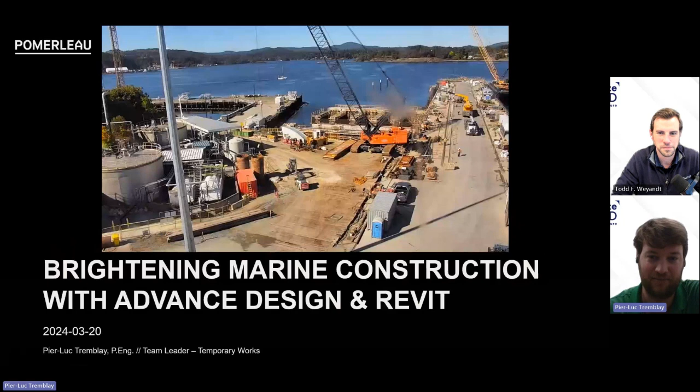My name is Pier-Luc Tremblay, and I'm the team leader of temporary works at Pomerleau. So, the AB Jetty recapitalization project: in Victoria, there's a naval base, the CFB Esquimalt, the Canadian Navy, and we are doing a big jetty for naval ships. I want to focus our attention specifically on the 19B, which is the bent at the end of that humongous pier.

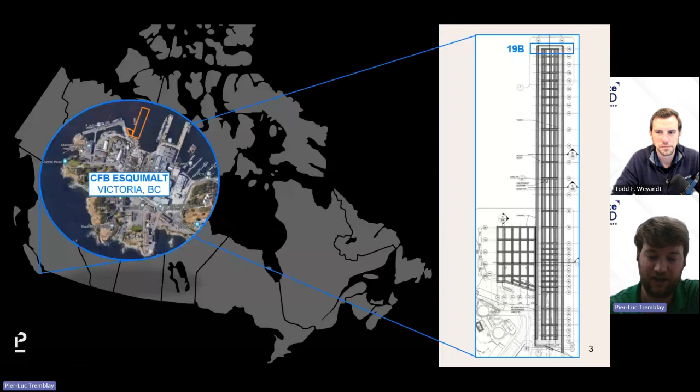It was a great challenge for us, and it went pretty well and was a great experience to share.

The 19B bent is big. It's 4 meters high by 4.1 meters wide, and the length is 26 meters. So we're talking about 430 cubic meters of concrete, approximately 43 trucks of 10 cubic meters, but it could be more. There's a lot of formwork area around it, with openings, and it's a big bent that's over water onto permanent piles, with a big structure going on top.

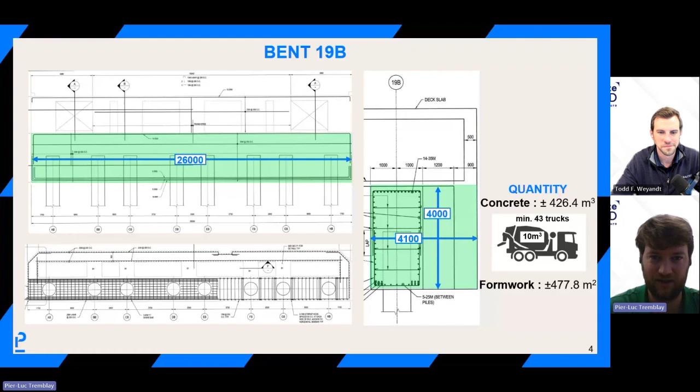So it was a big challenge to design all the falsework and the formwork to go into it. Another challenge was that we had a lot of parties involved: for the formwork we had EFCO, and Deep Foundation Works for the temporary piles.

We had Ruskin and RISEC, which are the geotech specialists. For the falsework, we did the design internally at Pomerleau, but fabricated it with United Engineering, and we were reusing the girder beam system that Ruskin used to drive all the piles. So there was a lot of coordination there.

Our client was the government of Canada, and the consultant was Stantec, and we had to verify everything with them so that everything went well.

Pier-Luc, can you describe the challenges you faced collaborating with so many different parties and partners throughout the different stages of this project workflow? How did you address these challenges?

It was a big challenge, but like always, coordination and open communication is key. We had weekly internal technical meetings involving the superintendent, project managers, and everybody involved in the team, to make sure we had our heads settled together and were delivering the same message. At each point we were presenting it to all the parties, especially for the formwork at the beginning, because we needed the formwork to match the falsework.

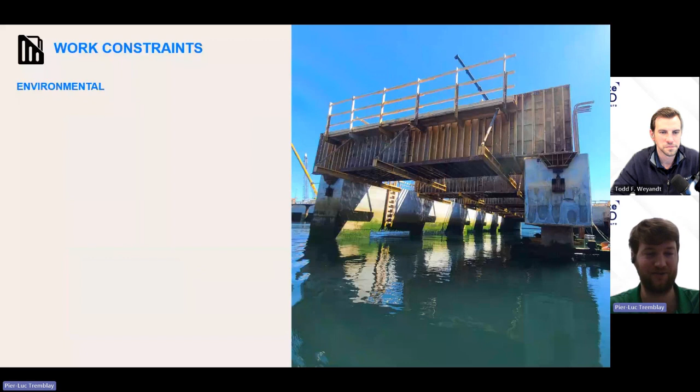First of all, the environmental constraints were that we were working in water, doing marine work with barges and divers. In the area there's a huge swing in the tide - you can see a 3.4 meter difference in head, and the buoyancy in our system was clearly affected, especially since it's salt water, which is heavier than fresh water. But at least we had still water, so we had negligible flow - it wasn't moving anything around, so that wasn't a big constraint.

The next constraint was the economic one. A dollar sign is mostly driving a decision, but in this case we really had to optimize the works because all the marine works cost a lot, and resources were unavailable, so we had to optimize for sure.

One of the biggest points too is that it's the last bent, so it's a crucial milestone in the work sequence. If we have a problem there, it's going to jam the end of the project and jam the rest of the installation of the pier. So it's a bad thing.

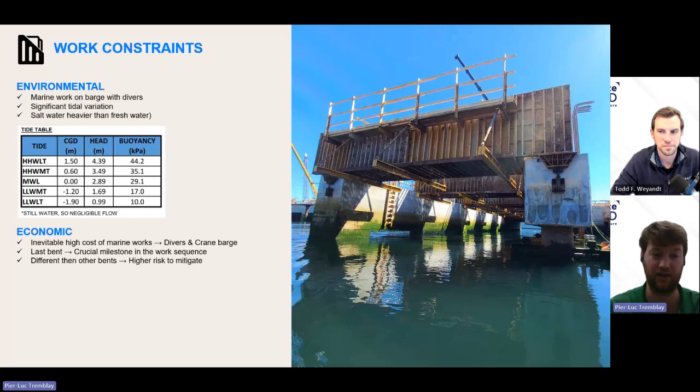The other thing is that it's different - I showed it quickly at the beginning, but it's eccentric and the other bents weren't. So there was a higher risk to mitigate since it was different than the other bents.

And in this context, the formwork and the deep foundation were designed by others, so that's one of the issues we had to deal with - we had to communicate a lot. And we were reusing some falsework, so we needed to inspect and validate each structure component.

Yeah, so you mentioned it there, but the underwater conditions present a unique set of challenges. How did you guys discuss these challenges? And then if you can explain how 3D modeling really helped assist in overcoming these.

Yeah, for sure. Underwater work is increasingly more challenging, mostly because you can't see anything. It reduces visibility, and everything is done by hand, so you need to think always less manipulation. Divers are exposed to a higher risk just by the fact that they are underwater and have a lifeline going up. So there's a lot of risk into this job, and yeah, there's the financial part of it that required us to plan precisely.

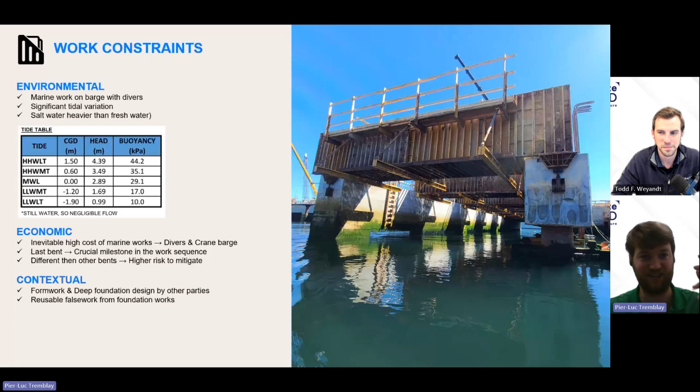And there are all other constraints that we need to think about just before doing the design and the planning. So before I show you the design, I'll just show you what happened in a brainstorm meeting, because it's crucial.

First of all, is the bent stable without support since it's eccentric? Well, the answer is no, and it was confirmed by the consulting firm. So we had to leave the structure there and dismantle it after we finished the deck on top, so we could just go from under or sideways for the dismantling. So it needed to be easy to dismantle. That was a hard one.

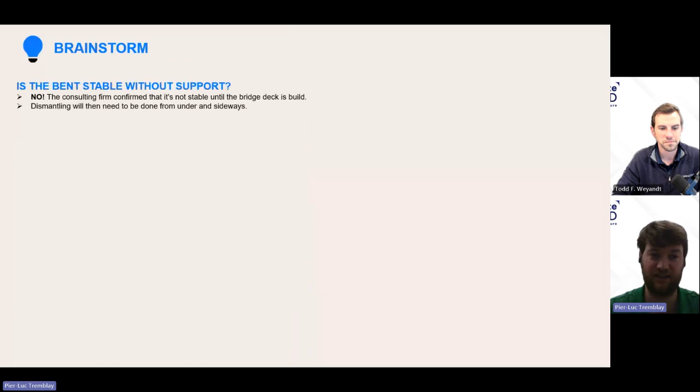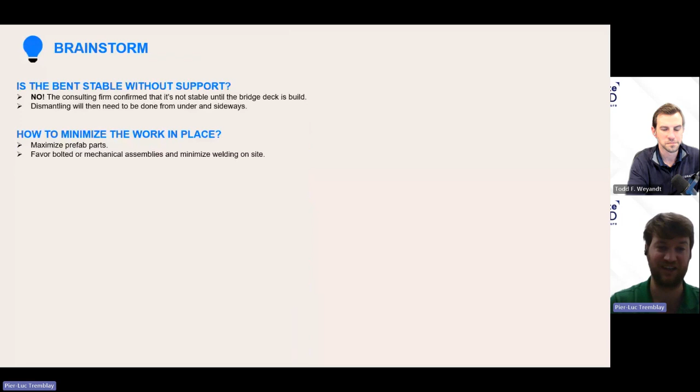How to manage the work in place? Well, how to minimize the work in place? Everything we needed to maximize the prefab, for sure. That was one of it, and everything needs to be bolted because everything needs to be assembled on the water. So if you introduce welding, it's a bad idea unless you need to do it.

Also, how to optimize the falsework? Well, since we're reusing a drilling template, we thought we could just use it and put a soffit on top, so that we could just bolt the EFCO formwork all around. That was a good idea because we saved a lot of formwork there, all the bottom formwork, by using modular platforms.

And another thing that's so important and could have been overlooked is that for the lateral bracing of the formwork, we could have gone downwards, but the problem is you'd expand your falsework for absolutely no reason, because you can't actually brace your formwork with the A-frame system at the bottom without extending the falsework underneath. So everything would go upwards, and that saved a lot of steel and structure and complexity. That was some of the best collaboration we had with EFCO about that.

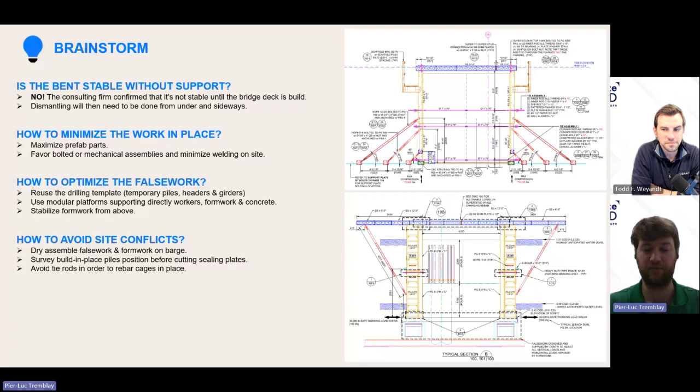That was great. How to avoid conflicts to make sure that everything fits? Well, we needed to do a dry assembly beforehand, and we needed to survey all the piles in position before we cut the sealing plates, which I'll show later. And we needed to avoid tie rods in the formwork, because we couldn't place the rebar cage if we had done that. Since it's on water, we want to build big rebar cages and just drop them in, and that's the best way to do it.

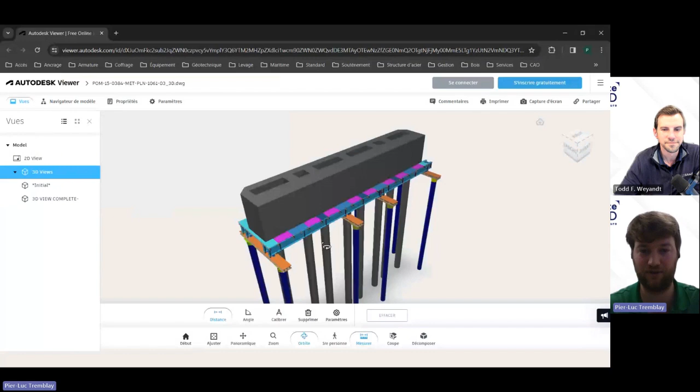So that brings me to answer back, how did we manage all those conflicts and constraint questions? How do we put that into an image? Well, by using Revit, we've done a big 3D model, and that's what I'll show you there. We put it into Autodesk Viewer, so you can actually just go online and share it to all your parties, so they can just look at it as if they're there.

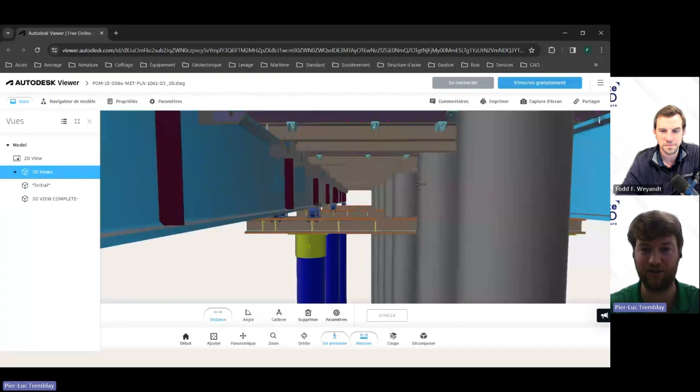And one of the most useful functions, I think, was the first-person one, because you could actually go under and see everything as if you're a diver. So to answer your question, Todd, that was one of the biggest helps we could have, because the divers could actually go under virtually and think about, okay, will I be able to bolt that there? Would I be able to put the gap clamp?

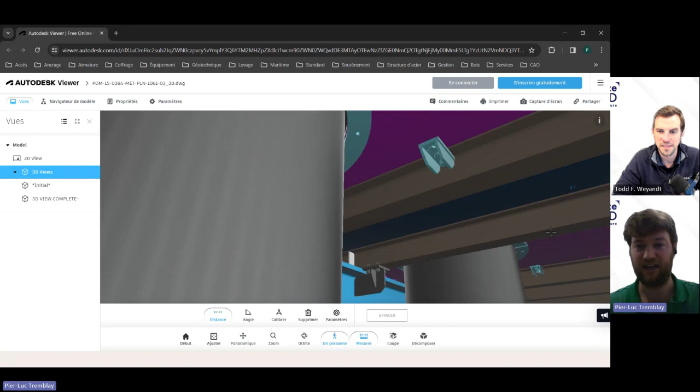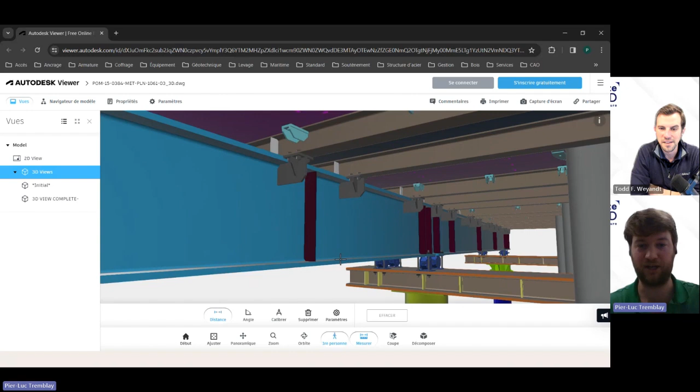Will I have a conflict there with the sealing plate and the actual pile? Can I go there and fit my hand? I'm not sure, well, I'll take a measurement. So you just go there, take a measurement, and oh, okay, I have like around one foot-ish, a bit more. Oh yeah, I'll fit. And then you can actually go step by step, at each pile, make sure everything fits, see that you can access the jack.

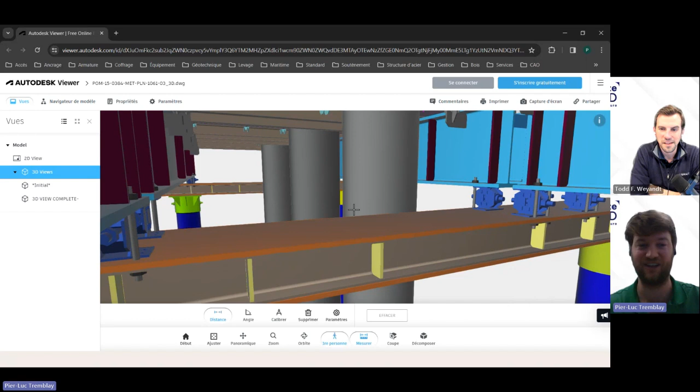And that could look like a minor detail, but the jack screw needs to be on the right side. It needs to be on the exterior part. If it goes on the interior part, well, you don't have access. Do you have a conflict with the ties and the stiffeners? Does it fit on the cap seat there? So that was an amazing tool.

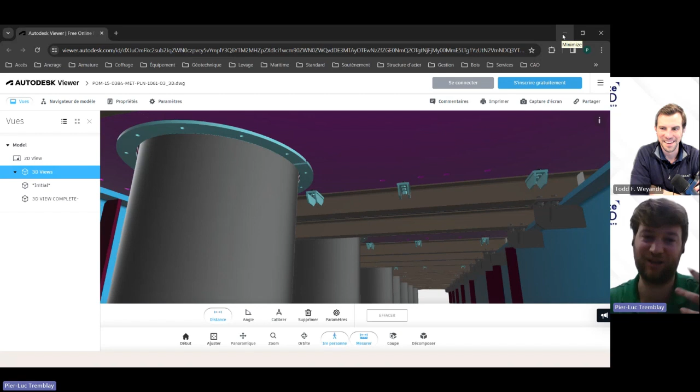And imagine showing that with everybody around, and everybody just looks at it and understands instantly what's happening. So yeah, that was one of the big pluses, let's say, of how 3D modeling can help a construction - pretty much through Autodesk Viewer and a good 3D model there.

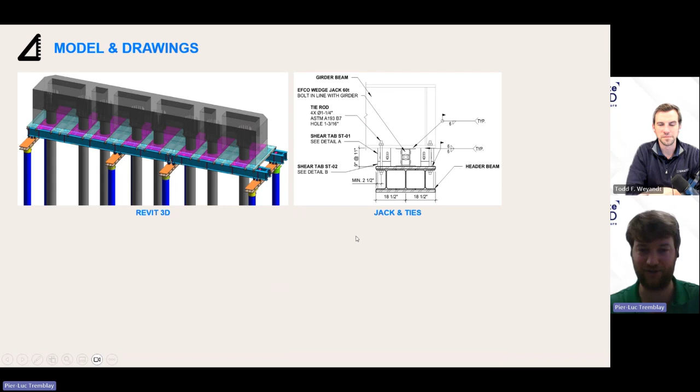So I'll show you. By introducing this model, I'll show you a couple of details that were invented and designed for that falsework.

We had a jacking system with shear tabs and ties. Shear tabs were to take the shear loads while being able to put down the jack and open it up and close it up, because at the end, when you pour that, you need to jack it down to strip it out. You can't just leave it there, it would be jammed. So you always need a jacking system.

On top of the temporary piles, we had cap seats, centered ones and offset ones, because construction is not perfect. It won't end up perfectly like on a drawing. All those piles had a tolerance and we needed to fit in. That's why the sealing plates were put afterwards and cut last minute to fit in, because all the piles had a different position than on the plan, so we had to fit it all.

Those sealing rings are just around the pile, we saw it in the 3D. It's to seal - you just put a foam in between and seal everything up, because you don't want water to come into the formwork while you're doing the rebar works. You don't want that.

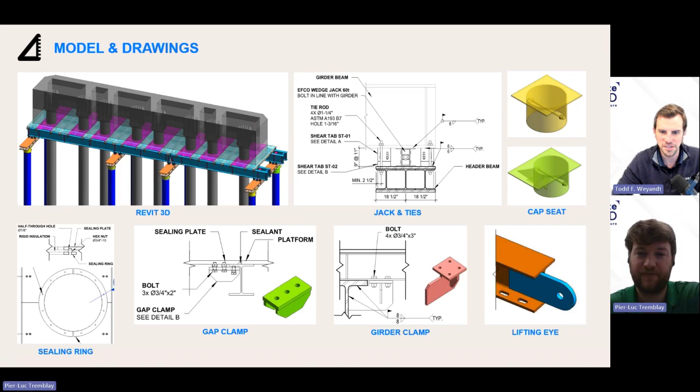Advance Design was a great tool for that project because yes, we saw the 3D Revit model with all the detailing and everything, but you don't come up with that model at the beginning. You need to go step by step, deciding whether to do something or not, going forward and backwards - it's an iterative process.

With AD, you can actually do the model in 3D, put all the loads, put different colors for different components, show the work sequence, test the model, test and change the beams, adjust, and get your results with a simple click. You can actually see your steel design there with some colors. I could have brought up the numbers, but everything worked out, so it's good.

The displacement - where you see, because there's a lot of displacement sometimes - is misleading, because it rules the model most of the time, especially for a concrete pour. When you pour concrete, you have tolerance for the deformation you'll have on the concrete, and most of the time it designs the whole structure, and that was the case there.

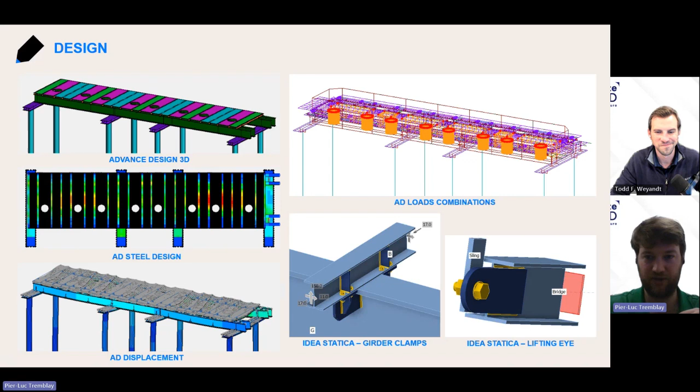So afterwards, I wanted to show you the installation sequence before I show you the actual work.

In Revit, you can do a sequencing step by step with the whole structure. You just click on whatever you want, put some color, and show it step by step, and it's amazing because by only looking at this, everybody understands how it was installed. So we put in the cap seat, then the header beams, then the girder beams with the platform, and after we put the platform, we slide in the sealing plates to fit it all. With just one high view on it, you understand what we'll do. So that 3D is awesome.

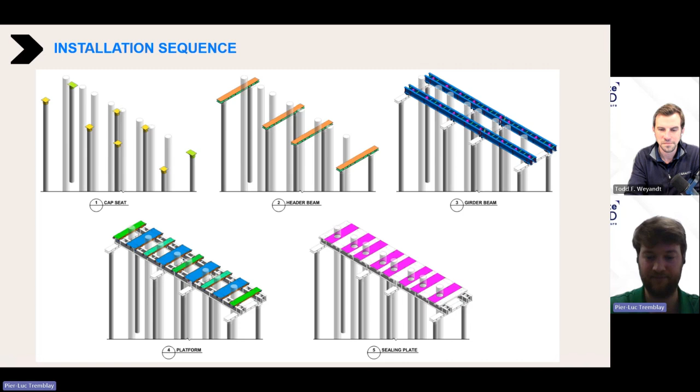And at the end of it, we needed to do the stamp drawing with all the detail, all the fab drawings, and that was a lot of work because our fabricator used our fabrication drawing, so we needed to make sure that everything, every detail, worked out perfectly. And it went superb on site. So all those ideas were put up in that final drawing, and I'm pretty proud of that work.

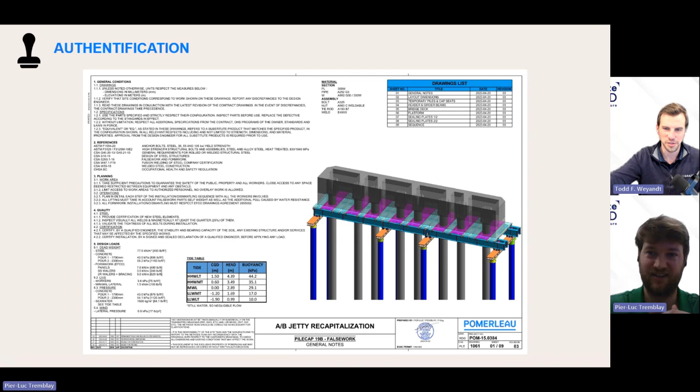Yeah, that's awesome, it's a big achievement for sure. What was it like going from the design to actually building it on site? That was the best part. When you actually see what's built on site and that everything works out, that was the best part.

I'll show you some pictures of the falsework that was pre-assembled on the barge. There you can see the actual bridge deck all assembled together without the formwork on top. We don't see the holes on the platform, but there were like thousands of them to fit in the formwork with bolts. So everything needed to be perfectly adjusted so you can match that tolerance of 1/8 of an inch so that the bolts could fit.

So that was one of our concerns, but everything fitted pretty well. In the middle, you can see the platform and the girder clamp that were welded on, pre-welded on the girders. Actually, we installed the platforms and then installed the girder clamps, bolting them into the platforms, and afterwards we welded on the structure to make sure it was a perfect fit, instead of welding the girder clamp and then trying to put the platform. So that was a great way to do it.

There you can see the gap clamp with the one-sided bolt, with the nut that was welded into the plate. And there afterward you see the girder clamp, the beams assembled with that sits on jacks and ties, and you can actually see the shear tab there.

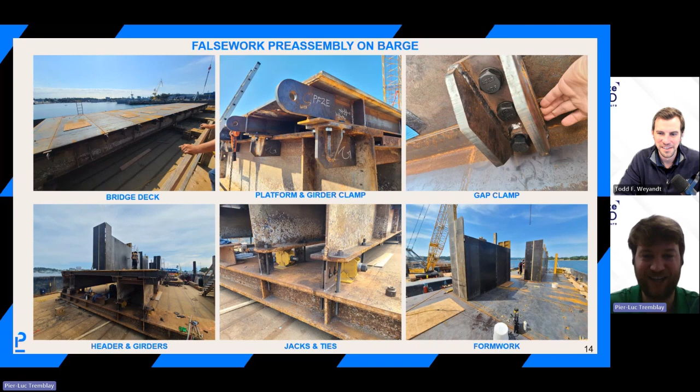And that brings me up to a little video of our site. At the end, you'll see that structure being installed. I hope the sound isn't too loud.

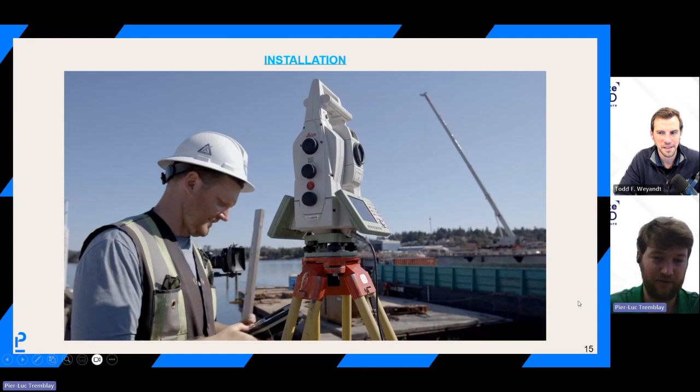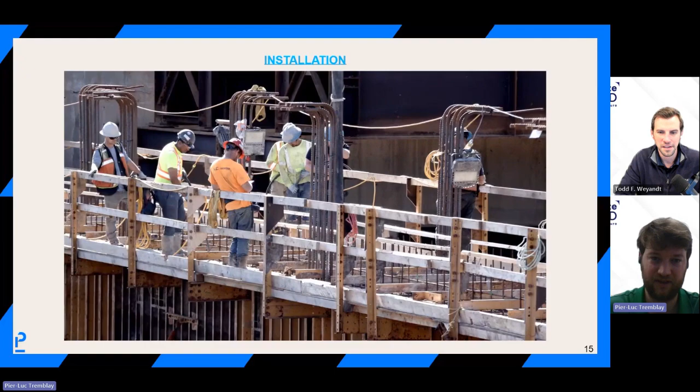We're good. So that was one of the normal bents. You see a lot of guys into it, a lot of formwork, a lot of force, a lot of everything. It's a huge civil work site.

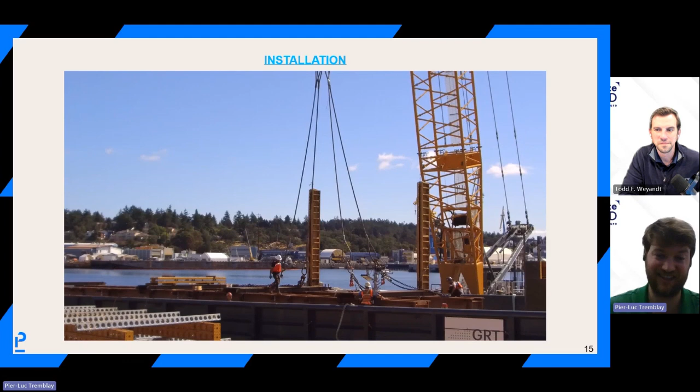Oh, and just a quick pause. Sorry. There you can see the structure that we were preparing for the lift. On the plan I showed only that we had the girders installed and then the platform, but we found an idea and installed the platforms on top of the girders so we could install 2 girders at a time with some formwork installed on it, because everything you can install dry costs less and saves time. That was a great idea from the superintendent.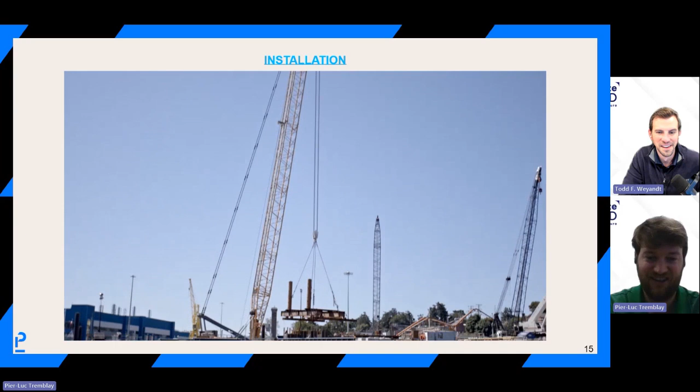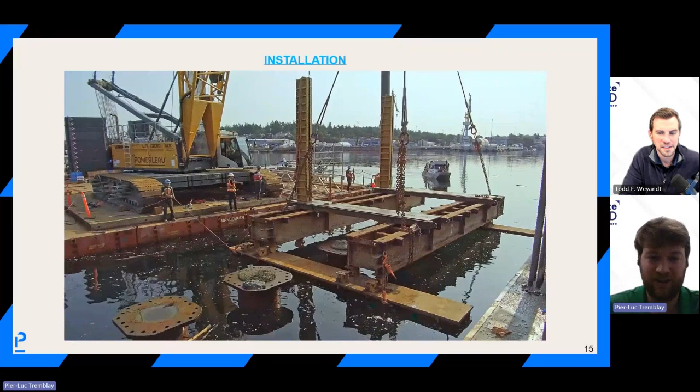And see the guys prepping all the works. Crane on the barge, a huge crane by the way. So that's the first part that we put in, and it worked out perfectly. Our superintendent was really proud.

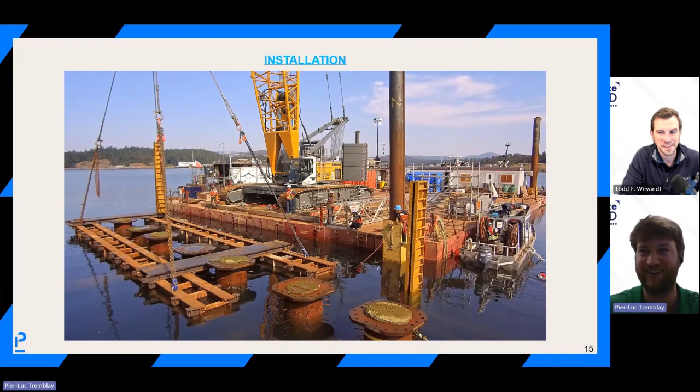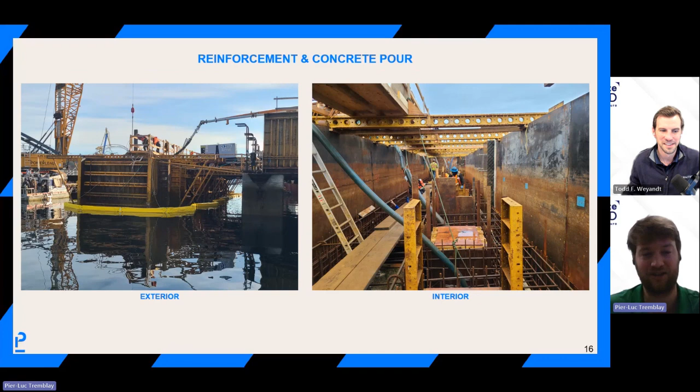So I'm pretty proud of that, and I thank you all for taking the time to listen to me tell that story.